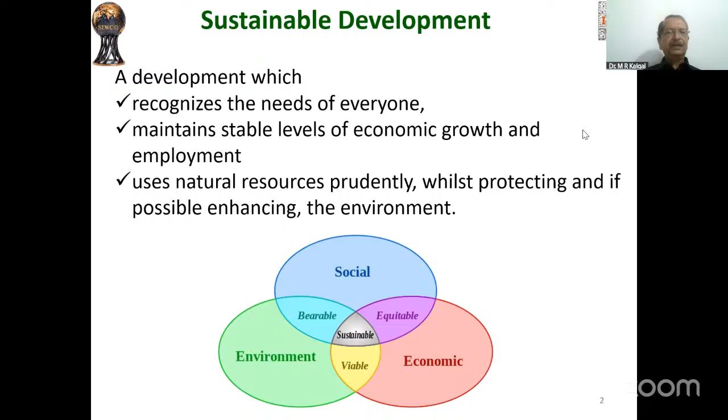Now, all of us have heard about the greenhouse gas scenario. Everybody is talking about sustainability, greenhouse gas scenario, carbon dioxide emission, ozone layer hole, and all kinds of things. So quickly, let us see the GHG scenario throughout the world.

China is the biggest emitter of carbon dioxide, or greenhouse gas, 26% of the total GHG, followed by United States at 12.5% and India at 7.06%, which is far lower, of course, slightly higher than European Union. But look at the GHG from China and United States.

Now look at the emission per person, because people may say the number of people there is less, so it might look big. The emissions per person, world average itself is 6.27 tons of carbon dioxide equivalent. Keep this in mind. Canada and United States have the highest per capita GHG, 19.6 and 18.28 tons of carbon dioxide equivalent. It's called carbon dioxide equivalent because it's not just carbon dioxide being emitted, but a lot of gases, all brought onto one platform called the equivalent. So per person carbon dioxide equivalent in USA and Canada are quite high compared to the world average. India has the lowest, 2.48, compared to the others.

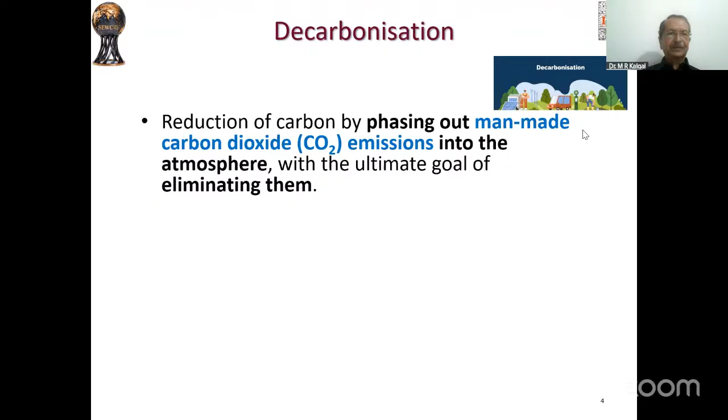Now, there have been several agreements. The latest one was the Paris Agreement of 2015, which is a legally binding international treaty on climate change. This was adopted in 2015 by 195 countries in the United Nations Climate Change Conference, COP21. They resolved, including India, that all 195 parties have signed saying they will limit global warming to well below 2 degrees Celsius compared to pre-industrial levels.

After industrialization, temperatures started going up. So keeping that as a datum, can we make sure that the temperature does not go beyond 2 degrees compared to pre-industrial levels, is what they are committing to. They have said preferably 1.5 degrees compared to pre-industrial level. This was signed and agreed to in 2015.

The global net human-caused emissions would need to fall by 45% from 2010 levels by 2030, if we want to achieve this 1.5 or 2 degree limit on temperature rise beyond pre-industrial level. So 45%, you have to reduce the carbon dioxide compared to what it was in 2010, by 2030, and try to reach net zero around 2050.

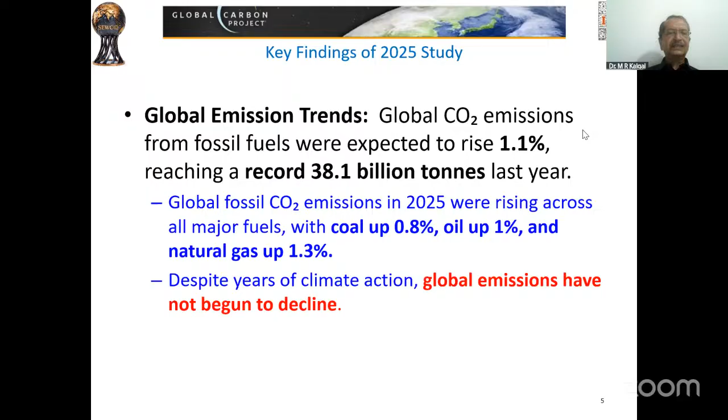Now, coming to our area, that is buildings and construction, the building materials are dominating climate change. How? Let's see. The built environment sector is by far the largest emitter, responsible for at least 37% of global emissions according to UNEP, the United Nations Environmental Program, as of 2023.

Now we are already in '26. So with 37% contribution to global emissions, we are to be more responsible from now on.

Most of the progress in our sector has been made on reducing operational carbon. People have been talking about energy or carbon dioxide emission due to various reasons. When buildings are built, the emissions created because of heating, cooling, lighting, cleaning, and all kinds of operations is called operational energy or operational carbon. All of us are concentrating more on that.

However, there is also what is called embodied carbon. This comes from the design, production, and deployment of building materials like cement, steel, and aluminum. Here, we are lagging behind because we are not taking much steps to reduce embodied carbon. Only for operational carbon are some efforts on. Both need to be pushed much harder.

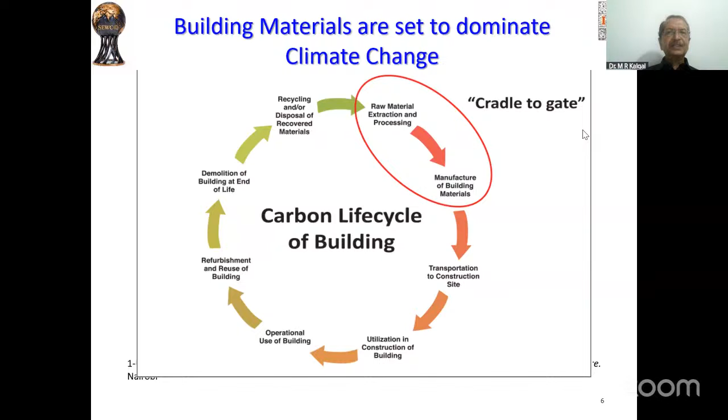If you look at all of this, there is one raw material extraction to manufacture of building materials, which is called the cradle to gate contribution. This is something which can definitely be attacked or attempted to be reduced. So there are now understandings and pushes, and even this talk is trying to emphasize the need for us to see that the building materials are attacked as the potential enemies of our climate issues.

Now, one of the largest construction materials is concrete, and we are talking today about precast concrete, so I have chosen concrete as the subject. Now, concrete is very widely used, abused, misused, and also less understood. So many people say that concrete is not sustainable because it uses the material called cement, and cement produces a lot of carbon dioxide, and hence concrete is not a sustainable material. Now, this is the general understanding of most of us.

Now, if you look at this particular concrete from those parameters which are used for evaluation to the contribution to carbon dioxide emission, it is the entire life cycle which I showed earlier, which consists of extraction, processing, construction, operation, demolition, and recycling. If you look at all of these parameters and compare it with all other alternatives that are available for construction, concrete makes a significant contribution to the triple bottom line which I talked about, that is environmental, social, and economic aspects of a sustainable development.

Now let us see whether we can make it more sustainable. Yes, there is some component of cement in it, but please remember cement is only 10 to 15% of the total concrete. But then there are other materials in the concrete also. So people are now looking at the possibility of making concrete more sustainable. How to make it more sustainable?

Obviously attack cement first. So to make cement more sustainable, some of the approaches are to use less energy intensive kilns at the factory, use supplementary cementitious materials to reduce clinker. Please remember that 1 ton of cement produces 1 ton of carbon dioxide is with the OPC in mind, the clinker in mind. So if it is 100% or 95% clinker, then 1 ton of carbon dioxide, 1 ton of clinker production results in 1 ton of carbon dioxide was true. But that again, people have now, with all the improvements at the factory and resource extraction, have brought it down to about 0.7 tons per ton of clinker.

So now use supplementary cementitious materials like fly ash or GGBS or any other materials. Obviously, you'll be reducing the clinker content. So the reduction in clinker factor will make it more sustainable. So if you take 700 kgs per ton of cement manufacture, if you use 50% of GGBS, then the impact is only 350 kgs now, 350 kgs of carbon dioxide per ton of cement produced. So that's an attempt to make cement more sustainable.

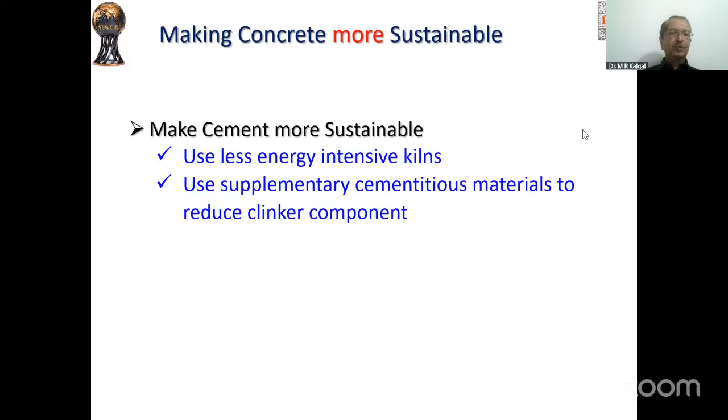Then they are trying to use new types of clinker, which produce less carbon dioxide, use alternative fuels and renewable energy during the production process, and if possible, produce clinker-free cement. So from the cement angle, these are the efforts that are going on.

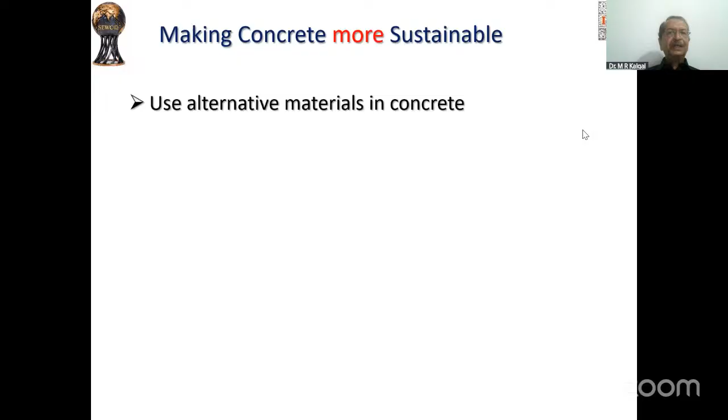Now, when you look at concrete itself, people are looking at using alternative materials within concrete. Now, what are those? Like recycled aggregates, secondary aggregates instead of the primary aggregates or the virgin aggregates that we are using. Similarly, wastes in concrete, they are trying to use the wastes of other industry as part of the concrete, as this is called converting liabilities to assets. So wastes as reinforcement, wastes as special additive is being tried out.

They're trying to make concrete more durable. So if anything is made more durable, there is lesser requirement for you to replace it. So you get sustainability through longer lasting structures. This is another attempt that is going on.

Then capture and sequester carbon dioxide. That is, is it possible to capture the carbon dioxide and also mineralize it, or put it inside the ground in the bedrock and make sure that it doesn't get into the atmosphere, bury the concrete. So this is another approach that is being pushed very hard. Then they are also trying to produce clinker-free concrete like geopolymer concrete, alkali activated reactions, and so on and so forth.

Now, while making, that is one cement angle, the other one is concrete, its ingredient angle. Third is the making and using of concrete. What can we do there? Use of appropriate construction chemicals judiciously to reduce the water cement ratio and obtain a dense and durable concrete.

That is also something that people are looking at. Then concrete, we all know that concrete made well, transported carefully, cast properly, and cured sufficiently would last very long and makes the concrete the most sustainable material.

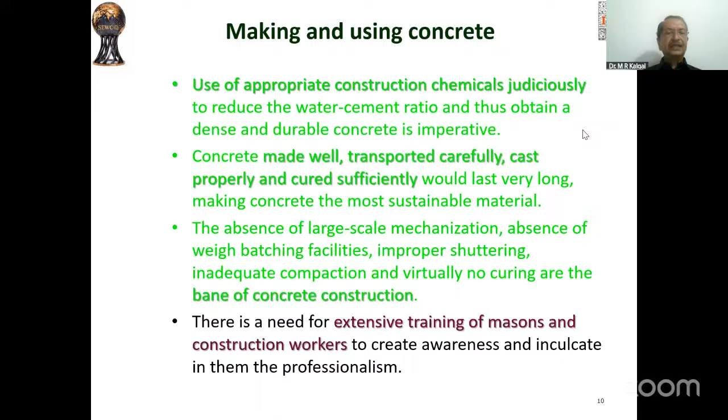Now, the absence of large-scale mechanization, absence of weigh batching facility, improper shuttering, inadequate compaction, virtually no curing - these are the bane of concrete construction, which all need to be focused on. And there is also a need to extensively train the masons and construction workers, create awareness, and inculcate professionalism in them. So these are the efforts.

So I thought I'll flash it. Now let's come to precast concrete. Now, all of you know what precast concrete is. It is a product produced by casting concrete in a reusable mold or formwork, which is then cured in a controlled environment, transported to construction site, and lifted and erected in place. This is generally an all-encompassing definition of precast concrete.

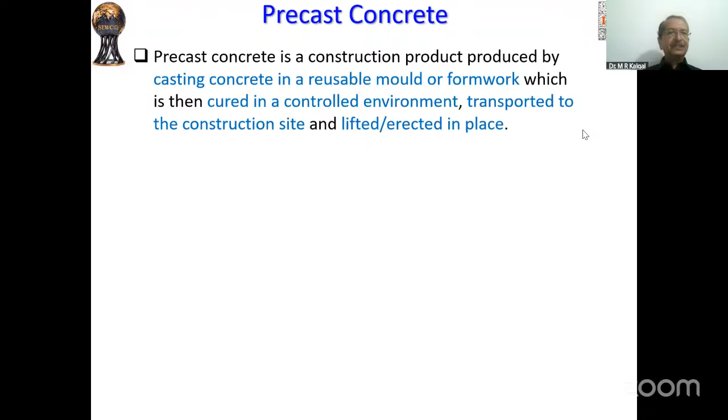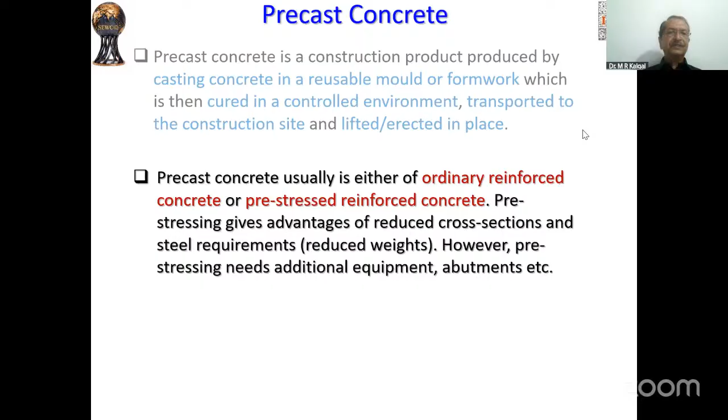Now, precast concrete is generally ordinarily reinforced concrete, or sometimes pre-stressed reinforced concrete also. So pre-stressing is done to get the advantages of reduced cross-section, reduced steel requirement, reduced weights, and pre-stressing of course needs some additional equipment - abutments, jacking equipments and so on and so forth. But still, a lot of economic benefits and strength benefits are there if you pre-stress a precast member.

Now, precast concrete can be either factory made or it can be made even at site. So if it is made at factory, it's called off-site. And if it is made at the site, it is called on-site. Depends on the volume of work and logistics, of course.

So if it's a big work, probably you might even set up a precasting yard at the site itself, provided there is space for it. And also it might become necessary if it's very difficult to get anything from outside to the site. So you may have to go for on-site.

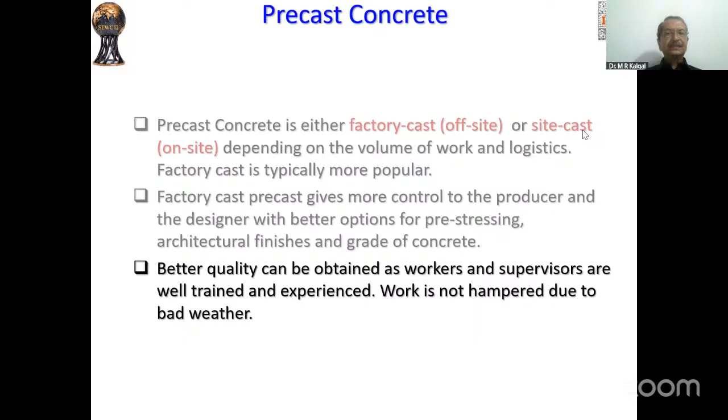But factory cast has a lot of advantages and it is preferred because it gives more control to the producer and the designer. He has more reliability or more belief or trust in what is made in a factory, with better options for pre-stressing, architectural finish, higher grades of concrete, etc. So factory precast is generally preferred. Now, better quality can be obtained as workers and supervisors are well trained and experienced, and work is not hampered due to bad weather and such other conditions.

Now, why precast? Quickly, let's go through. All of you are aware, but I just want to collate all the thoughts. Most important thing is speed, because the concrete elements can be manufactured under controlled conditions at the same time when early works like site foundation work etc. are being carried out. So just in time, you can bring in the ready-made elements and assemble them at site when the site is ready for that.

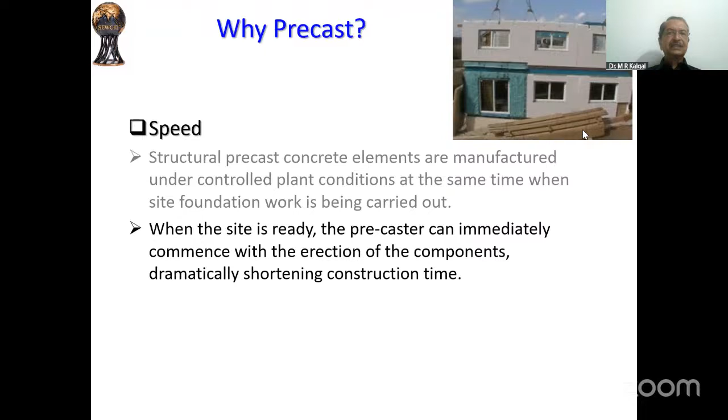So he'll erect the components and dramatically the construction time is shortened when you bring it from somewhere and simply assemble it there at the site. So it reduces also the on-site congestion, financing costs, and it accelerates the occupancy date.

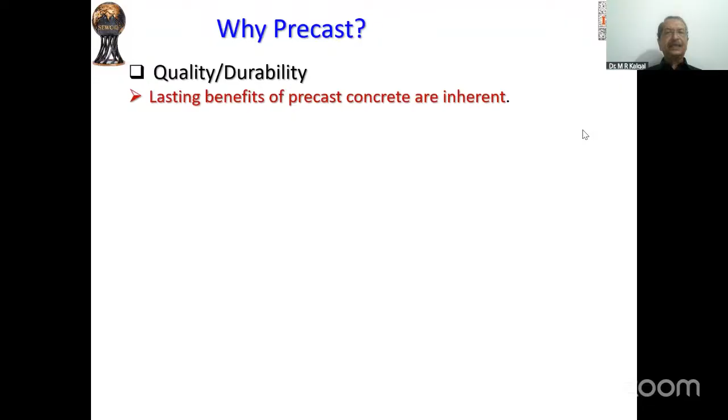Then another advantage of precast is the quality and durability. Lasting benefits are there which are inherent - high strength, high density, quality control - precast is superior to other building products, obviously. And in terms of durability - corrosion resistance, impact resistance, fire resistance, security, and long lasting, low maintenance - all of these are properties which are superior to most of the other competing building materials.

Now, production on the smooth steel molds ensures high dimensional accuracy and superior finish, and the molds are also reused many times, ensuring economy for us. The assurance of concrete product is achieved through environmentally controlled manufacturing condition, skilled workforce, and stringent inspection and concrete testing.

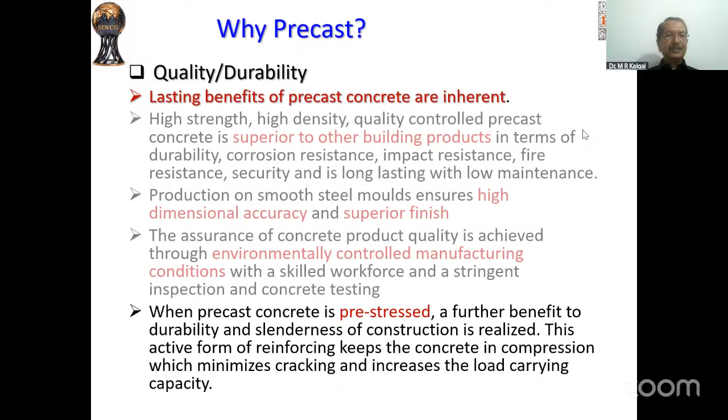So when precast concrete is pre-stressed, as I mentioned earlier, this active form of reinforcing keeps the concrete in compression and minimizes the cracking and increases the load carrying capacity. Another advantage is to have long spans.

You can have much increased load capacities, especially if you pre-stress it, and also because precast can be made with higher strength concrete and excellent quality control. It will be stronger and it has higher load capacities and sections are more efficient. Large span floor system leads to more flexibility as internal columns are avoided. That architects would be loving.

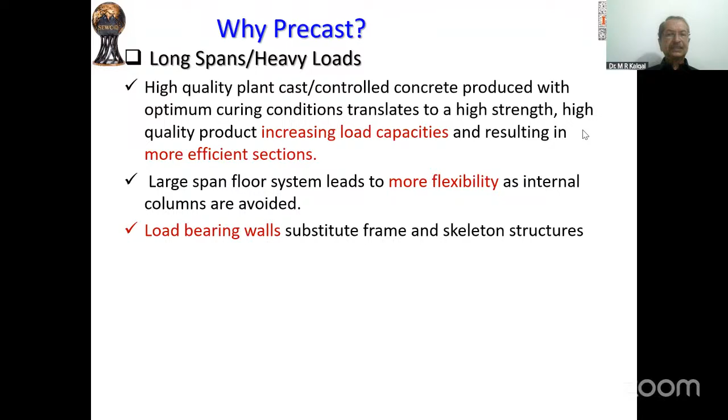Load-bearing walls substitute the frame and skeleton structures here, and you get flexibility in terms of even custom manufacturing for non-typical shapes and sizes. So these can be easily designed. This is a very important property.

Precast elements can be designed for easy removal and reuse to accommodate future building expansions and renovation, which lessens the requirement for building fresh. So this is another tenet of sustainability.

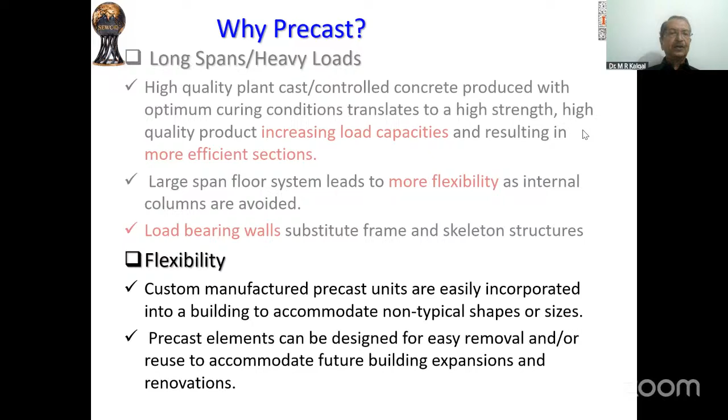All-weather construction is possible, so there is no issue. Plant-cast concrete units minimize weather delays. Then there's very low maintenance because of excellent material, and it's environment friendly. We will go a little more into this.

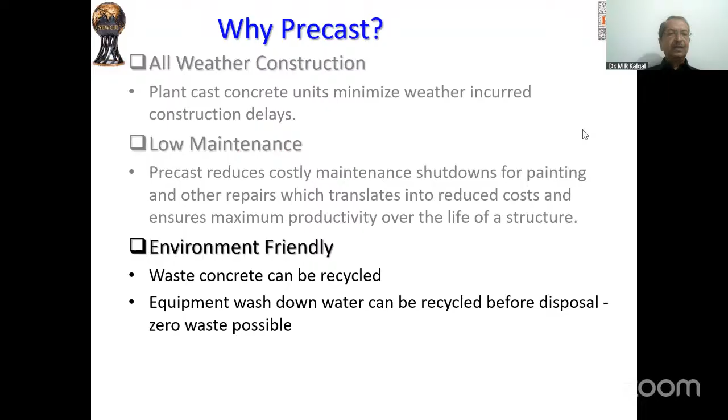Okay, now when it comes to economy, there are various reasons how economy can be achieved. Faster construction time, low maintenance, long life, potential reduced insurance premium - all of these contribute to overall savings.

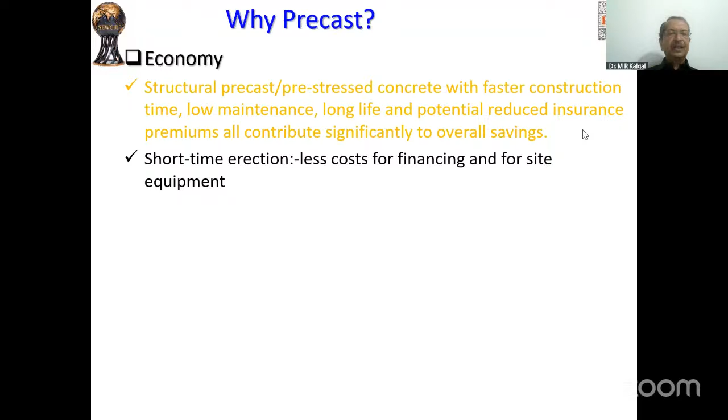Short-time erection means less cost for financing and site equipment, so your hiring charges for equipment reduce because you are erecting things much faster. Large repetition of elements will reduce overall production cost, with less labor supervision, craftsmen, etc.

Then lesser shuttering is required at site. Precise reinforcing during prefabrication saves steel and ensures exact rebar figures. We all know this, I'm just putting things together. So economically, it makes eminent sense to use precast.

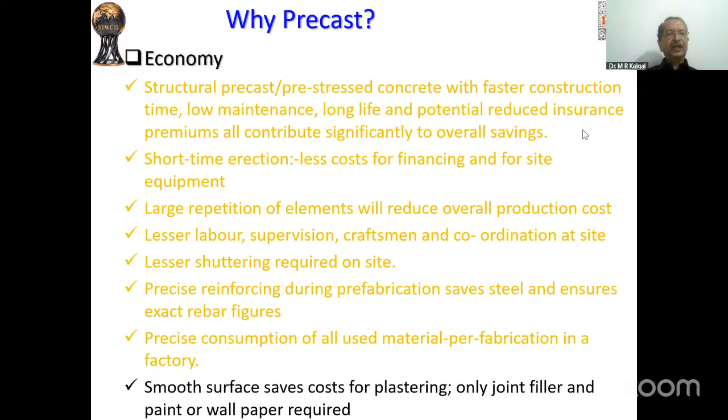Precise consumption of all material used per fabrication in a factory, and smooth surface that saves the cost of plastering. Only joint filling and paint, and probably wallpaper, will be used.

There are some miscellaneous benefits like pre-fitted doors and windows possible before erection, electrical conduits and pipes that can be embedded. A variety of surface treatments is possible by altering the shuttering or using form liners, exposed aggregate finishes, sand plastering, etc. Thin precast walls and facade panels increase the carpet area.

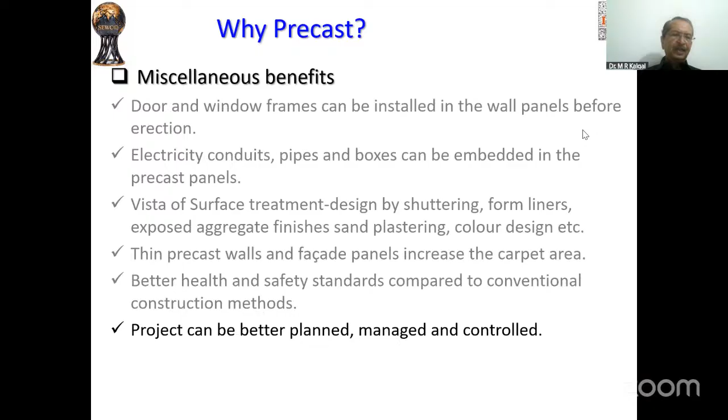Better health and safety standards compared to conventional construction methods, so a number of benefits are there. Projects can be better planned, managed and controlled.

Plant site can reduce transportation distance. If you put a precast plant at site, you can tremendously reduce the time and transportation emissions involved, and also increase the speed of erection.

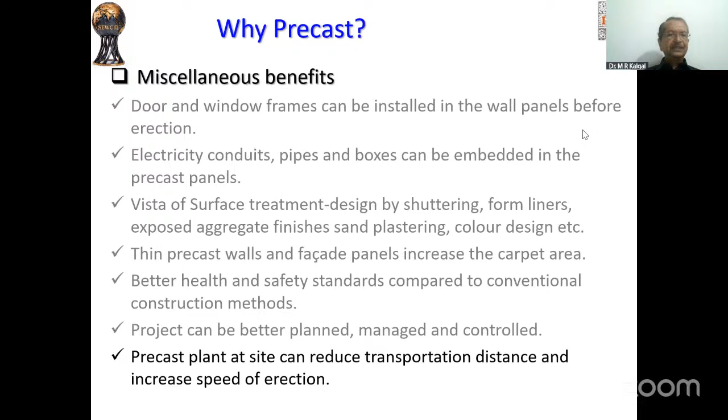So a few examples I just want to flash as far as application is concerned. There is hardly any application which precast cannot answer.

Now, primary elements are precast concrete slabs which are used. You can see a solid flat slab, a hollow core slab, a double T and a single T. The greater the span, the deeper the elements will be, as required by the structural mechanics.

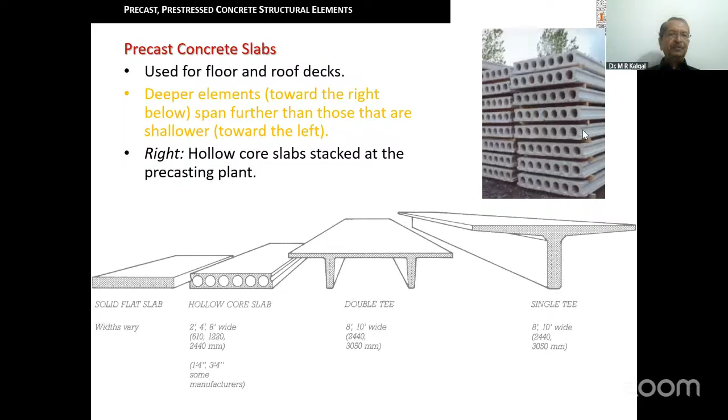You also have these hollow core slabs, which tremendously reduce concrete consumption as well as steel consumption, and can easily span a reasonably good, column-free space, and also they are light.

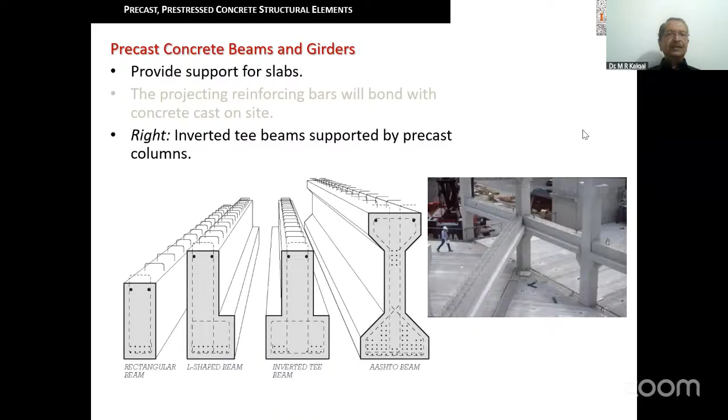There are also precast beams which support the slabs, and the projecting reinforcing bars will bond with the concrete slab cast on site or the screed concrete that you put. You can see on the right side these inverted T beams which are supported by precast columns.

Precast columns can also be reinforced columns, or they can be pre-stressed if required, if there is a lot of bending force or something like that. Otherwise, it's generally reinforced concrete precast. So it's possible to adopt whatever system you want depending on the stresses and the mechanism of load transfer.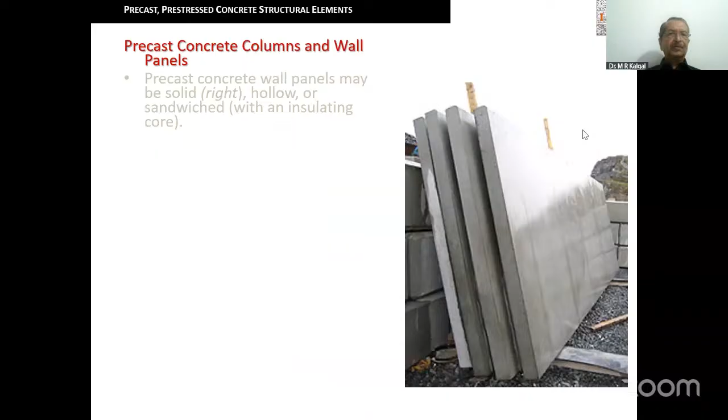Now these are wall panels, and wall panels can even be made with some kind of insulating core to make them lighter and thermally comfortable.

Wall panels can also be ribbed to increase their stress-handling capacity and minimize weight, and also get some special shapes and so on. It can be used for precast concrete stairs, and it can be used for uniquely shaped structural elements like you can see here in a sports stadium.

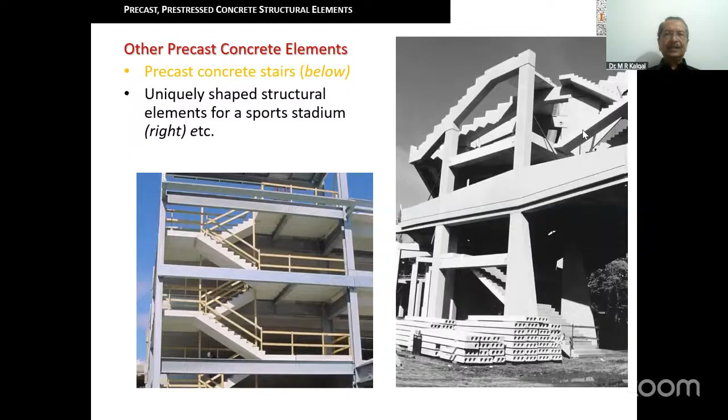Even assembly concepts vary. Vertical support can be provided by precast columns, wall panels, or a combination of all of them - that is, columns, beams and wall panels can be simultaneously used in different parts of the building. And the choice of roof and floor depends on the span requirements.

So precast slab elements are frequently used with other vertical load-bearing systems like site-cast concrete, reinforced masonry or steel. So many times people think precast means everything has to be precast - not necessarily. You can look at cost effectiveness, convenience and requirements, and go for a combination of site-cast concrete, reinforced masonry or steel along with precast.

Even in precast, many times the junctions and joints can be cast in situ. So there's no need to say either this way or that way—it can be a good judicious combination of precast and in situ concrete.

In assembly concepts, you can see clearly how various types of solid walls, solid slabs, and hollow core slabs are being used in a particular building.

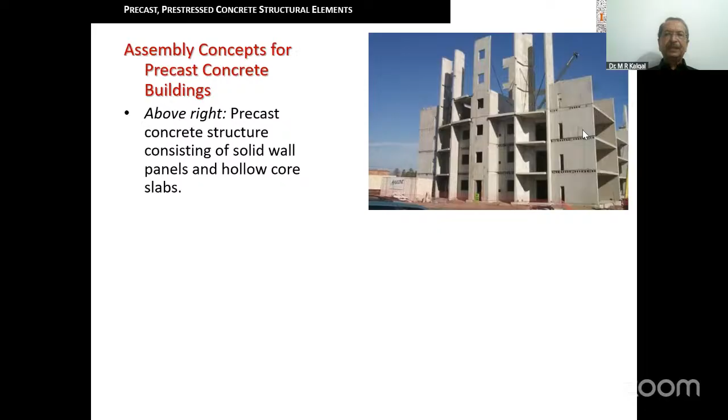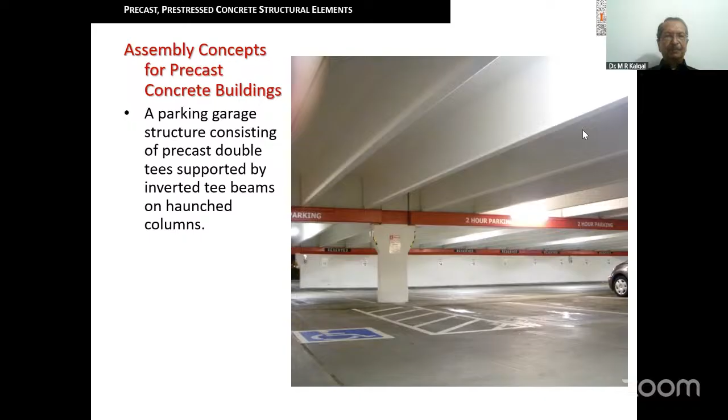Instead of carrying all the materials, mixing equipment, and casting wherewithal, you can transport small precast houses and simply provide them, especially for lower economic sections, EWS, or far-flung places.

Another example is a transportable restroom, which can be taken and erected at places temporarily and then shifted elsewhere. So precast is very eminently suited for this.

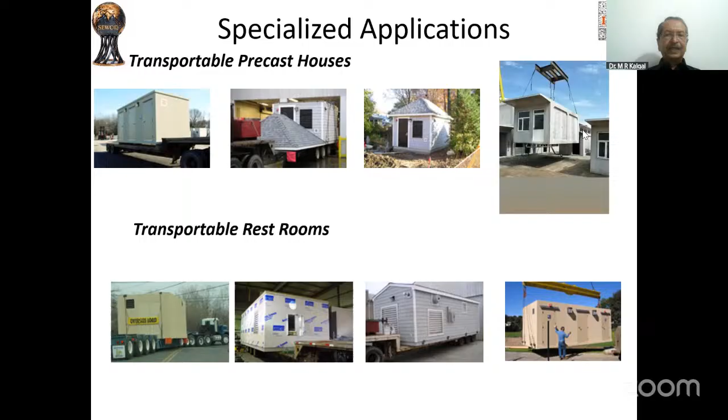It can also be provided in stadium arenas, like theater seatings or steps—all of these can be precast, and it's very easy and faster to implement.

You must have heard of the Motera Stadium, now the Narendra Modi Stadium in Gujarat, the biggest cricket stadium—it's all precast, a fantastic example of how precast can be used.

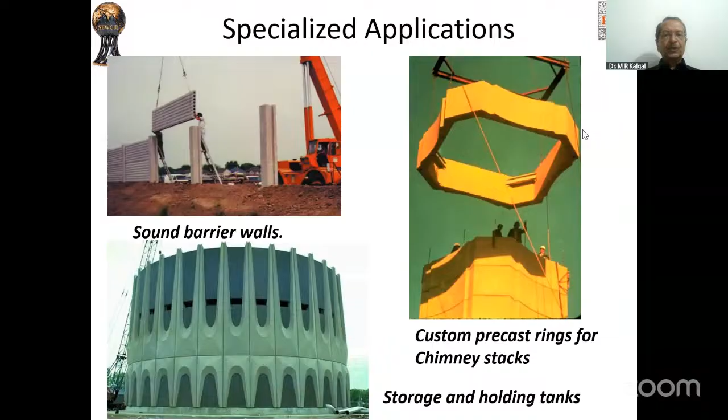In specialized applications like sound barrier walls, precast rings for chimney stacks, storage and holding tanks, interior firewalls, tunnel liners, industrial pipe racks, and culverts of various shapes and sizes—all of these can be precast.

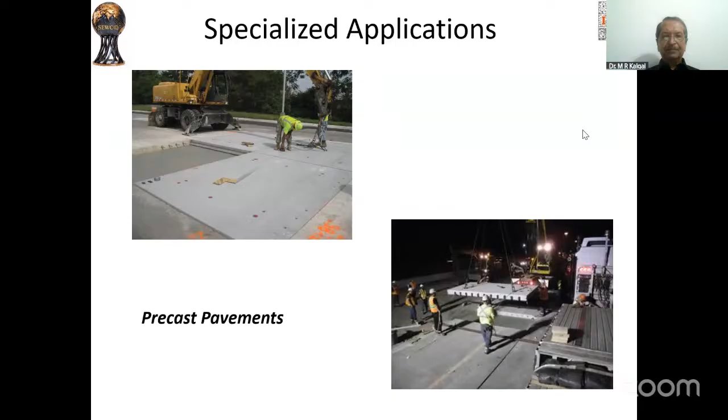Arch crossings, precast pavements—now coming in a big way in roads. The road pavement slabs are cast elsewhere, pre-stressed if required, then erected overnight, and the next day the road is ready for use. Only the sub-grade preparation takes some time. So precast pavements is one application.

Curb barriers, wheel stops, and curb inlet gratings, again in the road sector, and water storage tanks, manholes—even small things like cattle feed troughs can be made with precast concrete.

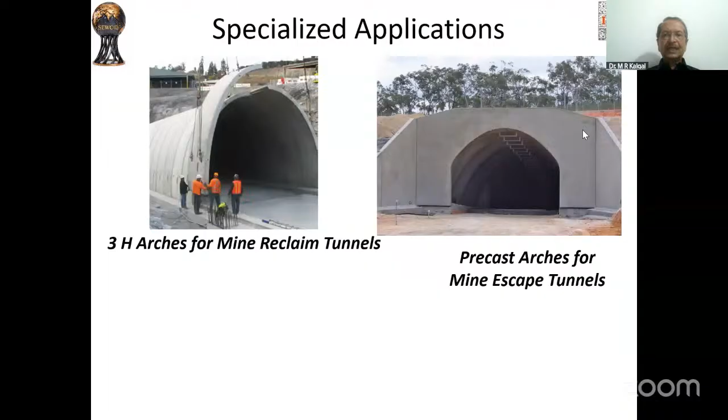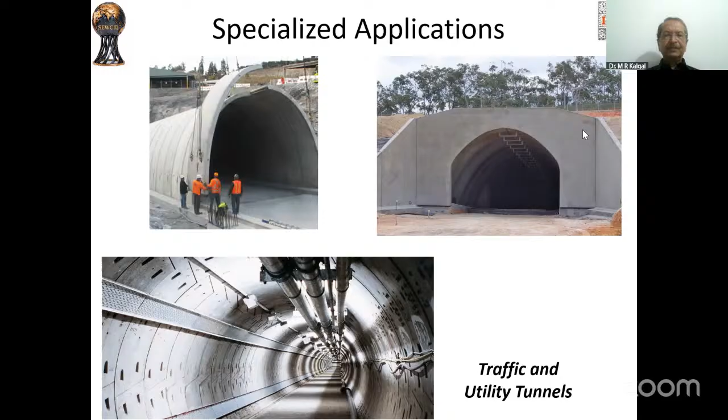There are precast arches for mine escape tunnels, traffic and utility tunnels—we see these now in metro construction everywhere, with the entire skin shell made of precast. In railway sleepers, for a long time we've been using precast crossing panels, ballast curbs, and so on.

Some unusual applications include breakwater pods, compound walls, and facades. You can see how beautiful the facades can be—it's not just plain and bland, it can be colored and textured. You only need to design the form liners and cast with a little care, and with self-compacting concrete now available, precast becomes so easy.

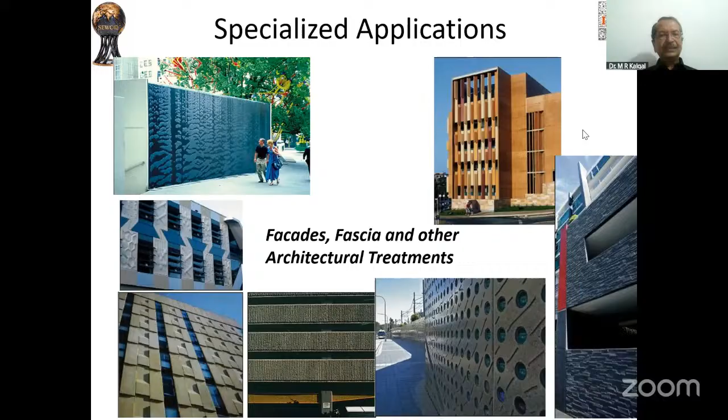Lastly, I'd like to discuss how precast is a good approach for sustainable construction. Although most consumers are concerned with the present and future health of the natural environment, very few are willing to pay more for a building, product, or process that minimizes the environmental burden. Everybody appreciates it, but they must also see how they can contribute.

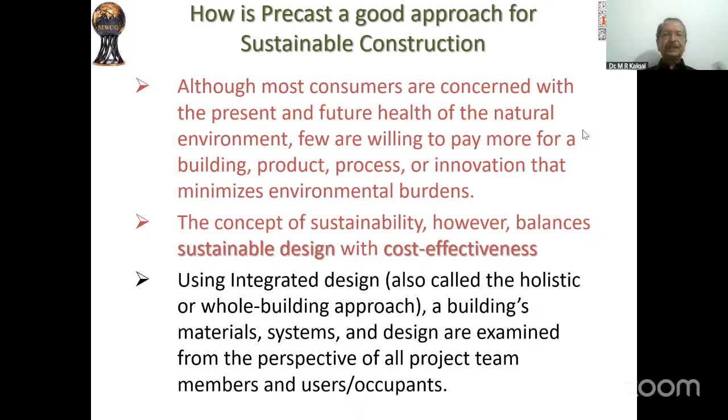The concept of sustainability balances sustainable design with cost effectiveness—both are required. Using integrated design, also called the whole building approach, helps ensure that the building's material, system, and design are examined from the perspective of all project team members, users, and occupiers. Energy efficiency, cost, durability, space flexibility, environmental impact, and quality of life are all considered when making decisions regarding building design.

Precast concrete contributes to sustainable practices through integrated design, efficient material use, incorporating SCMs, reducing construction waste, site disturbance and noise, reducing emissions by avoiding transport of raw materials to site, and improved air quality at site. So it contributes in a big way to sustainable practices.

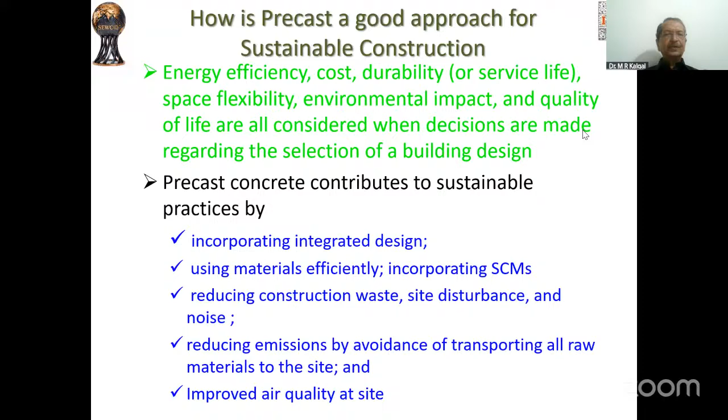Now there are some new trends, which I'll take another five minutes to finish: the rise of smart precast systems in modern construction, digital transformation technology shaping precast concrete, and future materials transforming precast concrete. In fact, material science is one of the fastest areas of innovation in precast concrete, driving major improvements in strength and durability.

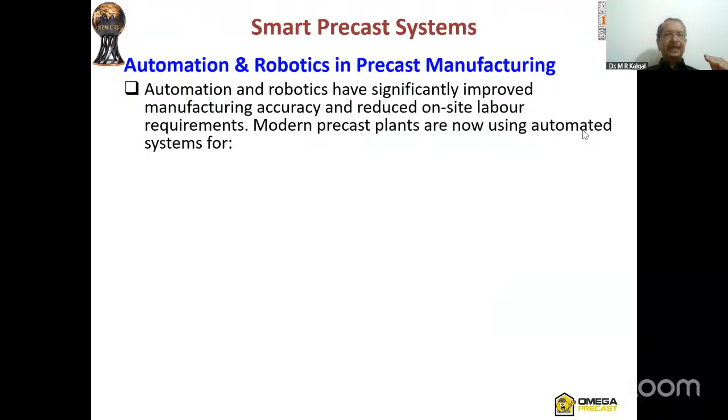Now let's see all of them quickly. As far as automation and robotics is concerned, the most important thing in modern precast is that automation came to make sure that manufacturing is accurate and on-site labor requirements are reduced.

So how are they automated here? They are using it for rebar bending and cage welding with robotic precision, automated mold preparation to speed up production cycles, robotic concrete placement and compaction for consistent density and finishes, and laser guided dimensional checks to reduce quality control errors.

FIB has produced a report which says that by using these automated mold systems, they can increase production efficiency by 35% and reduce material waste by 25%. For large scale projects, these advantages compound to massive savings in time and labor.

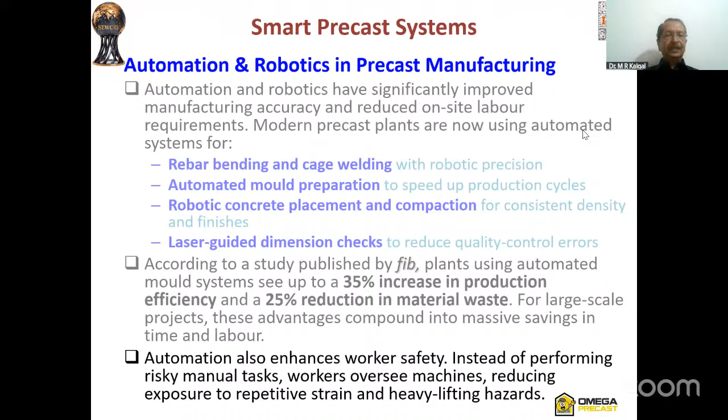Automation also enhances worker safety by avoiding risky manual tasks. Now the workers will only oversee the machine. They will be far away from dangerous places, reducing exposure to repetitive strain and heavy lifting hazards.

Another aspect is IoT sensors embedded in precast systems. These are tiny devices embedded in precast components during production that offer real-time monitoring throughout the structure's lifespan. Common IoT measurements include concrete moisture levels, temperature variations, crack development, movement, load and stress patterns, vibrations, and traffic impact, all of which can be measured and monitored.

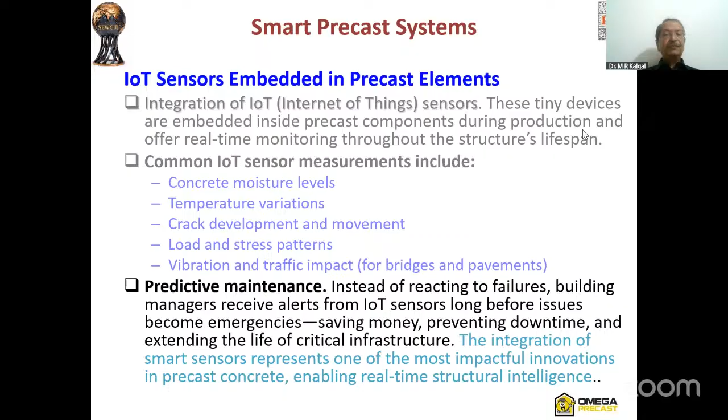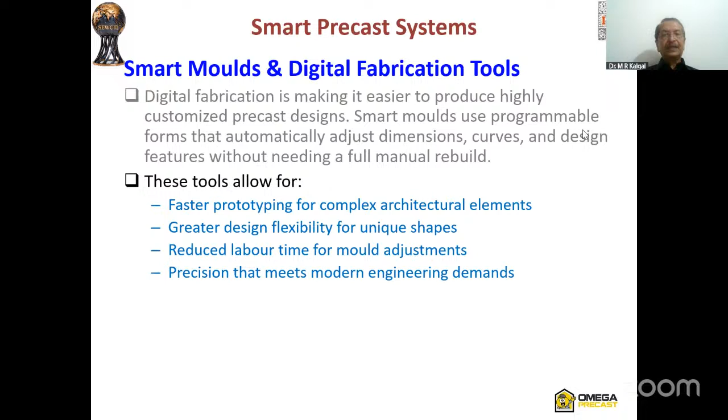Then there are smart molds and digital fabrication tools. Digital fabrication is making it easier to produce customizable precast designs. Smart molds use programmable forms which automatically adjust dimensions, curves, and design features without needing a full manual rebuild. These tools allow for faster prototyping of complex architectural elements, greater design flexibility, reduced labor time for mold adjustment, and precision that meets modern engineering demands.

This combination of speed and accuracy supports both mass production and high-end architectural builds. These continue to push the innovation of precast concrete by allowing faster prototyping and greater customization.

Now under digital transformation, BIM is already being talked about for seamless design and production, and it has entered the precast area also. BIM helps teams collaborate efficiently from concept to installation, avoiding delays and costly reworks. BIM helps in four ways.

One is clash detection, that is, clashes between pipes, cables, and structural elements are detected very quickly. Shared 3D models can be built, made, and shared with architects, engineers, and contractors for better understanding. Accurate quantity estimation can be done to prevent material shortages, and precise lifting and installation planning can be done.

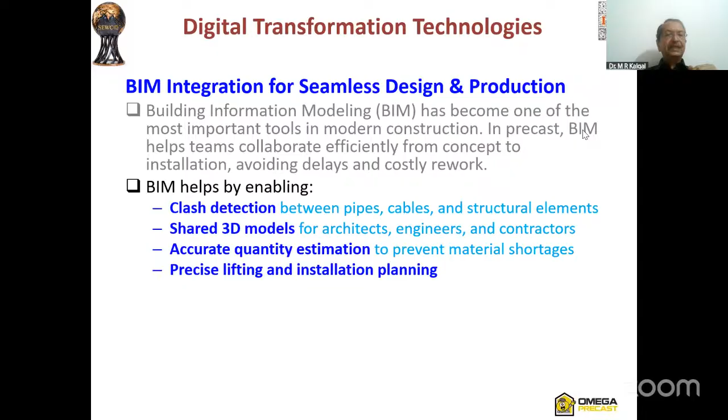A McKinsey report says full BIM integration can reduce project timelines by 10-20% and minimize construction waste by up to 20%. Isn't that sensible for sustainable construction? For precast, the benefits are even greater since components are prefabricated off-site and require near perfect coordination.

There is another concept called digital twin. Whatever is being constructed, you create a virtual real-time replica of the physical structure. Using data from sensors and BIM files, digital twins allow owners and engineers to simulate and monitor how a structure will perform over time.

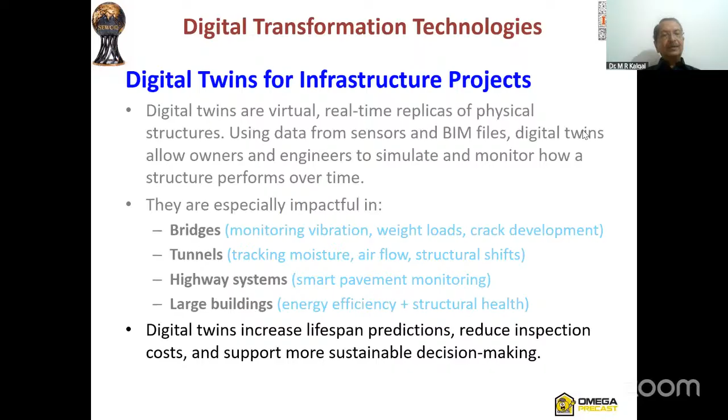They are very useful in bridges for monitoring vibration, weight loads, and crack development; in tunnels for tracking moisture, airflow, and structural shifts; in highway systems for smart pavement monitoring; and in large buildings for energy efficiency and structural health. Digital twins increase lifespan predictions, reduce inspection costs, and support more sustainable decision making.

Now, artificial intelligence - how can I end without talking of AI? AI powered quality control is becoming a game changer in precast plants. Cameras and scanners equipped with machine learning can detect surface defects, air pockets, texture inconsistencies, and dimensional errors faster than the human eye.

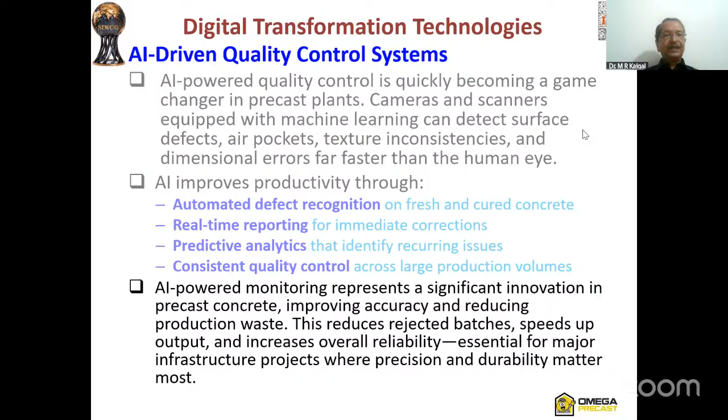So AI improves productivity in precast. I'm talking only about its application in precast: automated defect recognition on fresh and cured concrete, real-time reporting for immediate corrections, predictive analytics that identify recurring issues, and consistent quality control across large production volumes. AI-powered monitoring represents a significant innovation in precast concrete, improving accuracy and reducing production waste.

As far as material is concerned, one or two materials I would like to take here. One is ultra high performance concrete. Now everybody is talking about it. This is one of the most celebrated innovations. UHPC provides compressive strength levels exceeding 150 MPa, more than 3 times stronger than typical structural concrete.

So the benefits because of UHPC are as follows: longer spans with thinner sections, superior durability and abrasion resistance, minimal maintenance requirements, extended service life for bridges and infrastructure.

A few more slides on UHPC because this is also a favorite topic of mine. It's a high strength ductile material, concrete, formulated by combining Portland cement, silica fume, quartz flour, fine silica sand, high range water reducer, water, and steel or organic fibers.

It's also called reactive powder concrete. Many years ago, this was produced even in India. And now a lot of people are attempting to use it in their structures. And it's very ideally suited for precast.

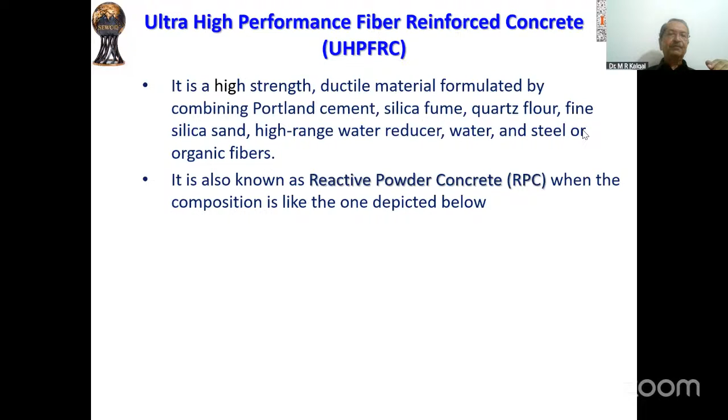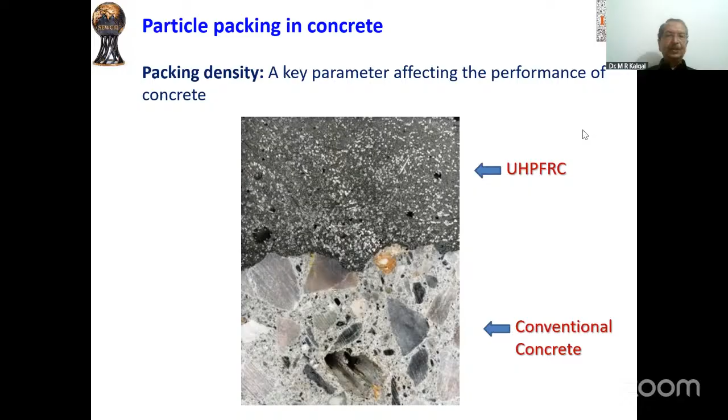So what you see on the top half is the UHP FRC, that is your ultra high performance fiber reinforced concrete, or UHPC to be short, and the conventional concrete. So you can see that there are virtually no voids, and hence it is a very densely packed material. Denser the material, stronger it is, and more impermeable it is.

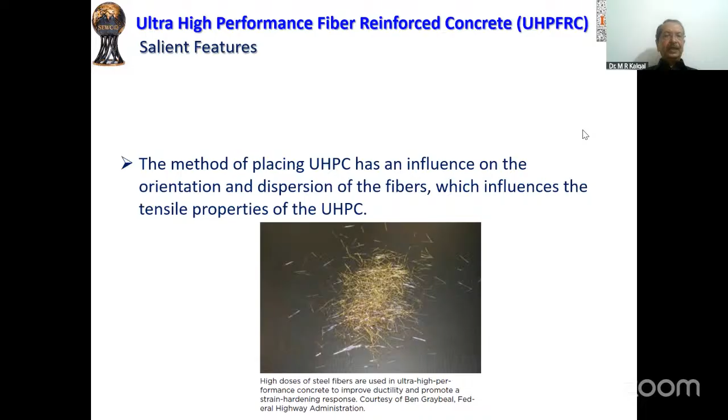So the salient features are like this. As a class, UHPC is a high cementitious material with very low water cementitious material ratio. It can be mixed in conventional mixers, but requires a little longer time. A lot of fibers are used, mostly metallic fibers, and the method of placing has an influence on the orientation and dispersion of fibers, because the fibers can move in a flowing concrete and align parallel to the flow. The properties of UHPCs are affected by the curing regime also. I'll not get into all of this.

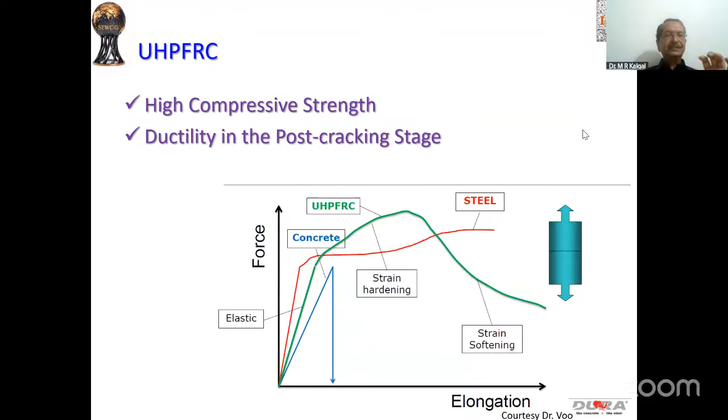So in essence, it has high compressive strength. It has ductility in the post-cracking stage. If you see the comparison, blue is for concrete, the red one is for steel, and you see fiber reinforced concrete, UHP FRC, is having much higher. It even shows some amount of strain hardening and very large area under the curve, which means the toughness is much higher here. It has an internal crack bridging capability.

It has dimensional compatibility. It has essentially zero permeability and hence long lasting, excellent bonding capacities. This is something which is very unique to UHPC. Abrasion resistance similar to rocks.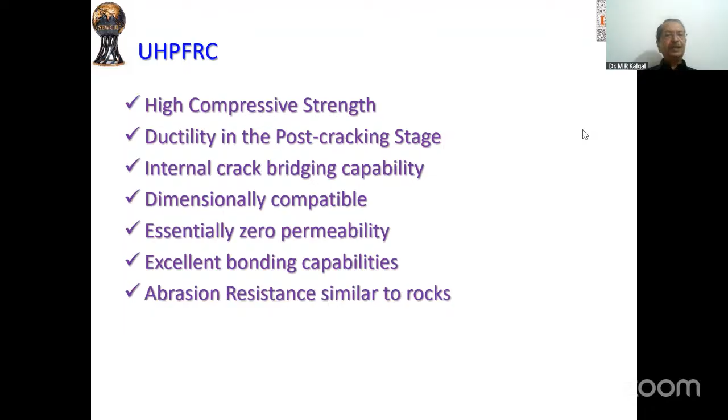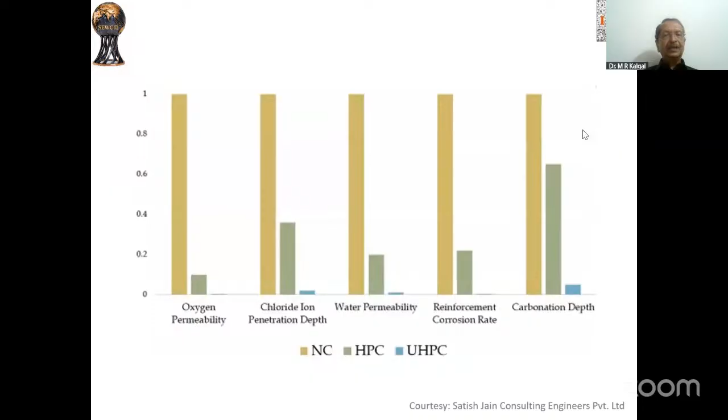So if you see the comparison, you will see that the blue one on the right side has the least oxygen permeability, chloride ion penetration, water permeability, reinforcement corrosion rate, and carbonation depth. Because of all of this, it makes it possible to produce thin, complex shapes, curvatures, and customized textures and concepts that were earlier difficult. Now it is easy to provide that.

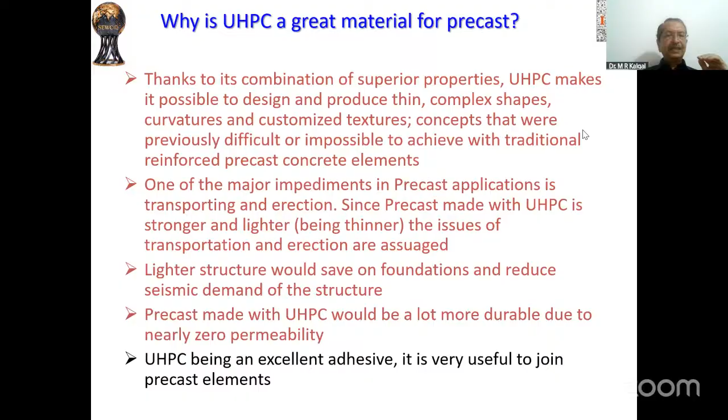So major impediments in precast application were transportation and erection. And because precast made with UHPC is stronger and lighter, the issues are more or less assuaged. Lighter structure would save on foundations and reduce seismic demand on the structure as well. Precast made with UHPC would be more durable due to nearly zero permeability. It is an excellent adhesive, very useful to join precast elements.

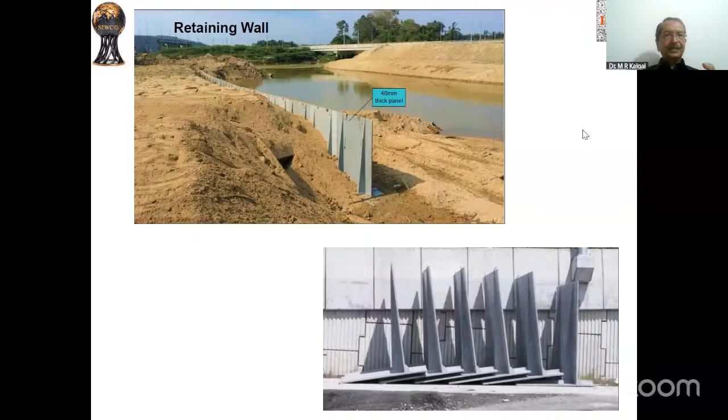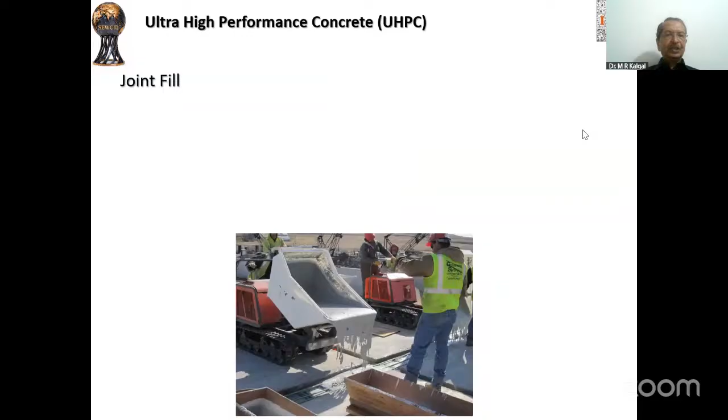As a joint fill, I said, if you have two precast members to be joined, just pour the joint with this UHPC and it bonds far better than even the precast which is there. So this is something that is used. And the other one people are talking about is carbon cured concrete.

Carbon curing technology means that instead of traditional steam curing, carbon dioxide is injected into the concrete during curing, where it becomes permanently mineralized. This gives up to 30% reduction in carbon footprint, stronger early strength, faster curing and production cycle, and compliance with green building standards, all possible with carbon cured and carbon negative precast.

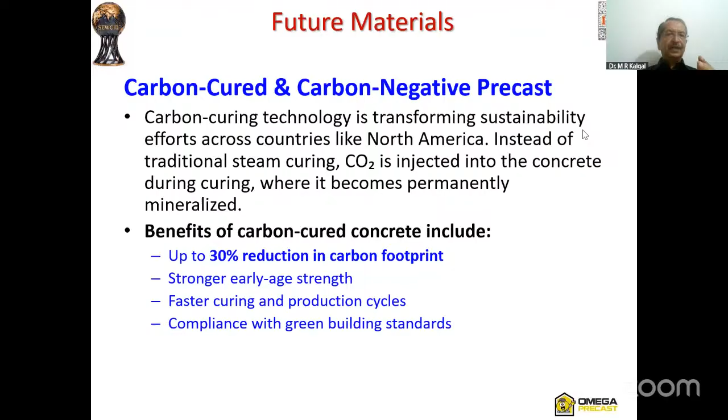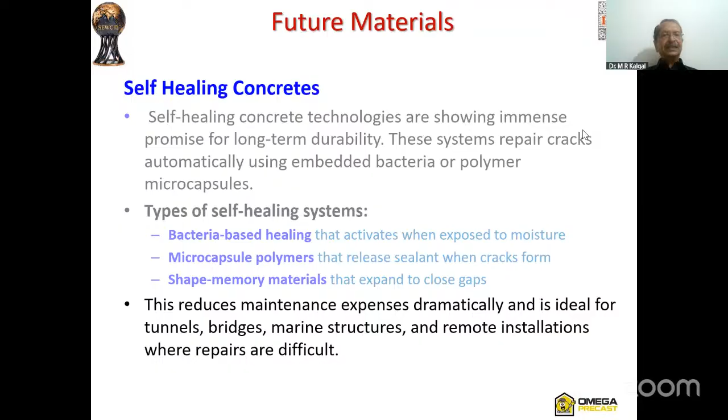People are also talking of self-healing concretes, a little far away, but still possible. We have bacteria-based healing, microcapsule-based healing, shape memory materials, and so on. This reduces maintenance expenses dramatically and is ideal for tunnels, bridges, and remote installations where repairs are difficult.

So last is what is required to popularize precast construction in India: increased mechanization in manufacture and assembly, modularity and possible repeatability. The more modular it is, the more repeatability opportunities there are, and the more economical precast will be, as all of us know.

Transportation issues - the equipment, the trucks, and other logistic requirements - and then the need for speed and volume. We have to build up volumes and speed, then it becomes economically viable. Availability of skilled workforce has to be ensured, and a lot of training is required.

Modularization in individual houses can also be tried so that precast can be implemented in this sector. Right now, in the individual house sector, there is virtually no possibility of precast because nobody believes in modularity. Everyone asks for different sizes, and then combination becomes a little difficult.

Solving the issue of the hub and spoke model - if you want to make one factory which makes all the precast components and supply it to nearby places within, let's say, 200 kilometers, what is important is the road. The road network should also enable this, and facilitating road network and transporting of the elements should be ensured.

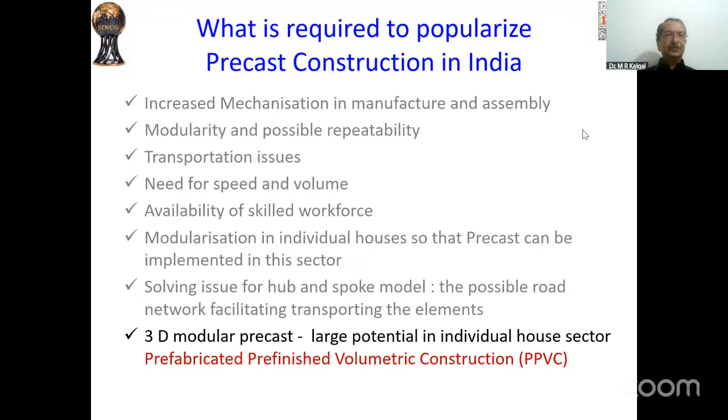3D modular is becoming big again, especially in Singapore, Australia, and other places. The entire house is pre-fabricated at the factory, lifted, taken there, and assembled. Two or three modules put together become one full house. This has been tried in many places, even in India, and is called prefabricated, pre-finished volumetric construction, PPVC. This is going to come in a big way, and with UHPC, this is definitely possible.

A clear understanding of jointing mechanism and sealing of joints is very essential, because one of the big complaints is that it leaks. That is bringing a bad name to precasting. Precasting is not the problem; the problem is the jointing mechanism and sealing joints. Jointing mechanism also becomes very important for seismic resistance.

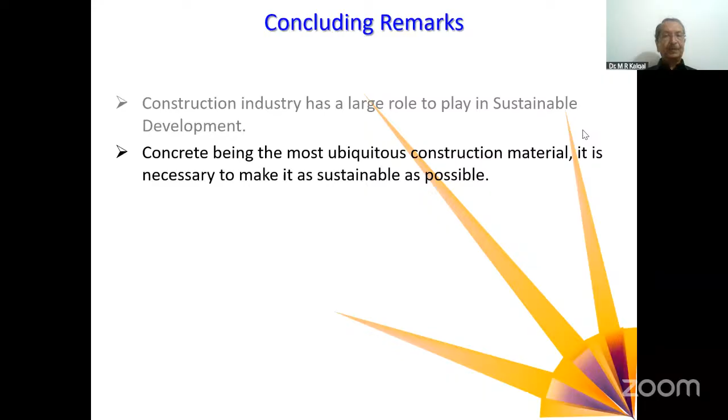In conclusion, the construction industry has a large role to play in sustainable development. Concrete being the most ubiquitous construction material, it is necessary to make it as sustainable as possible. Precast concrete presents a compelling solution for reducing the carbon footprint of the construction industry, allowing for efficient production, lower emissions, and long-term durability, making it a key component of future sustainable construction practices.

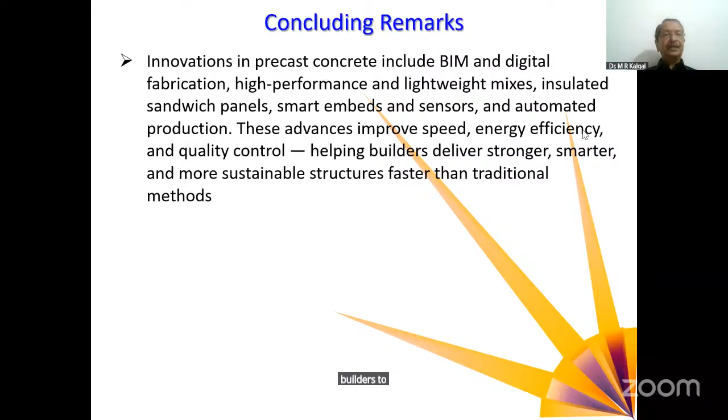Innovations include BIM, digital fabrication, high performance lightweight mixes, insulated sandwich panels, smart embeds and sensors, and automated production. All these advances improve speed, energy efficiency, and quality control, helping builders deliver stronger, smarter, and more sustainable structures faster than traditional methods. The drive towards more sustainable construction is achievable only when all stakeholders in the industry - including developers, designers, builders, suppliers - recognize and appreciate the importance of sustainability in construction.

Thank you very much for the opportunity. I am humbled that I got this opportunity to speak in memory of Dr. A. Ramakrishna. Thank you all, gentlemen.

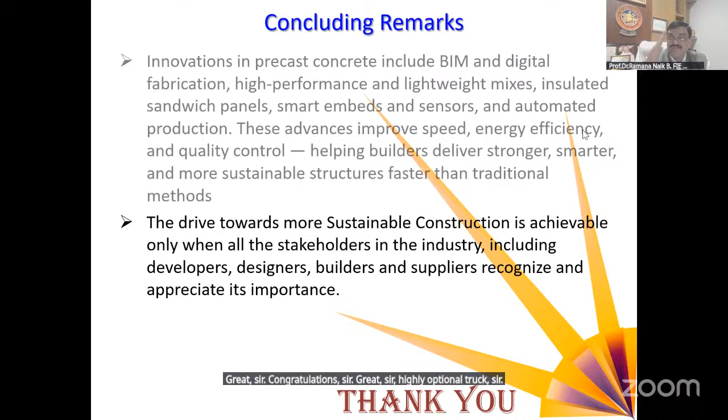Great, sir. Congratulations, sir. Great, sir. Highly appreciable talk, sir. Really, we're proud of you, Dr. Kalgal, sir. Some eminent engineers from USA, sir, Dr. Ramakrishna Rao, sir, wrote in chat. I think you have seen this.

Sir, I have a question. Yeah, kindly. Dr. Ranjit, sir, go ahead.

Sir, actually you are having the background of post-tensioning of structures and precasting and all. How is the entry of 3D printing in the precasting yards and all? Because for post-tensioning and precasting, molds are very important, and when you are going away from the molds, when you are using 3D printing, is there any firm or method? Because parametric architecture, as you mentioned, is going to be very significant, not only in the facade, but also in the element design itself - variation of sections, not like a beam earlier with rectangular section and all. So how is this 3D printing going to affect this? And sir, what about the material?

Because you are from material science, what exactly is the grade of 3D printing they go for, and what exactly is the development required for 3D printing to be used in general? Quite many questions combined in one, but the essence is the focus on 3D.

Now, 3D printing is a technology where generally we avoid using reinforcements, and instead try to make the material itself capable, like using fiber reinforced concrete or materials which handle forces by shape rather than by bending. So most bending elements are avoided, but there's also another concept where you can precast or cast elements elsewhere which can be assembled into a building.